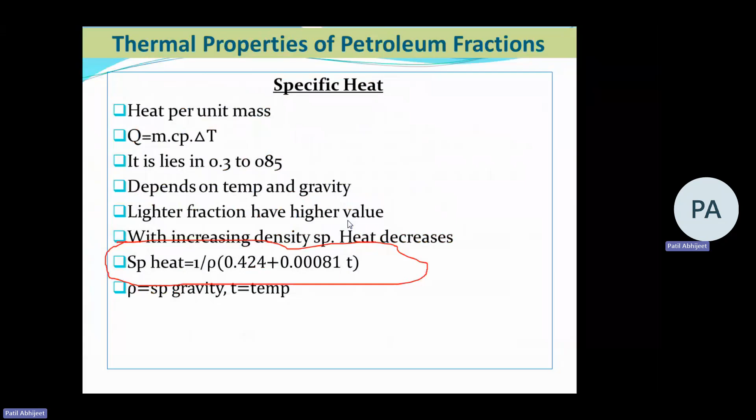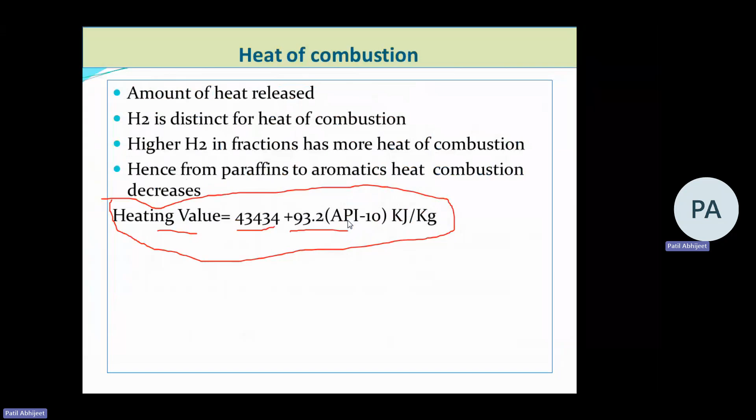Next is the heat of combustion, that amount of heat released when it is burned with oxygen, with its specific volume, with its known value. Okay, so hydrogen has the highest heat of combustion, which is different from other heats. Next is the latent heat of vaporization. It may be fusion and thermal expansion as well. Okay, the last property is what we call the spontaneous ignition temperature.

The temperature at which the petroleum fraction can catch fire and burn continuously without the help of any external agency. The external agency may be a flame, it may be any other type of agency which motivates, or you can say forces, it to catch fire at a higher level. Okay, so that is called the spontaneous ignition temperature.

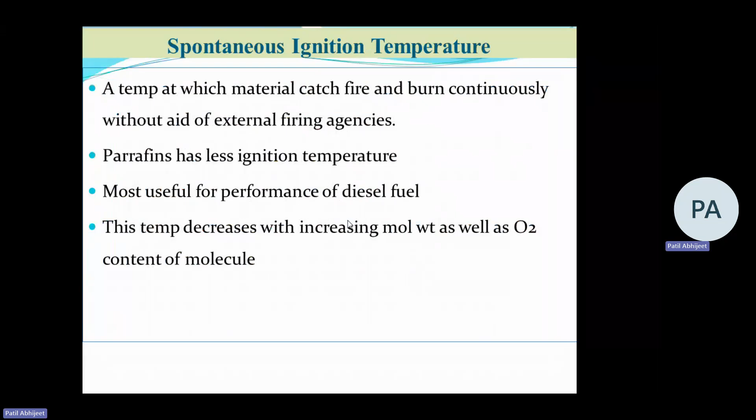Okay, the most important property is viscosity. Viscosity is that property which is especially applicable for lube oils. Everyone knows that viscosity is the property by which it offers resistance to flow. So viscosity is that property of the oil which offers resistance to the flow through the device.

Okay, so this property removes all the frictional forces between the two moving bodies, and based on that, viscosity index is the most important consideration, because viscosity index indicates the variation in the viscosity characteristics with respect to temperature. Everyone is aware that viscosity goes on decreasing with increase in temperature. So different devices like the Ostwald viscometer are there that measure the viscosity.

Then the Redwood viscometer is there. The Redwood viscometer is specifically used for petroleum products, for measuring the viscosity of that oil, and generally we are calculating kinematic viscosity. Kinematic viscosity, I think you are aware, is the ratio of absolute viscosity to the density.

And always remember, in the refinery, absolute viscosity is not considered. We are always considering kinematic viscosity, and CST, that is centistokes, is the commonly used unit for specifying it. In literature it will be said it is a viscosity, but from the unit point of view it will be mentioned in terms of CST, that is centistokes. So obviously it is a kinematic viscosity.

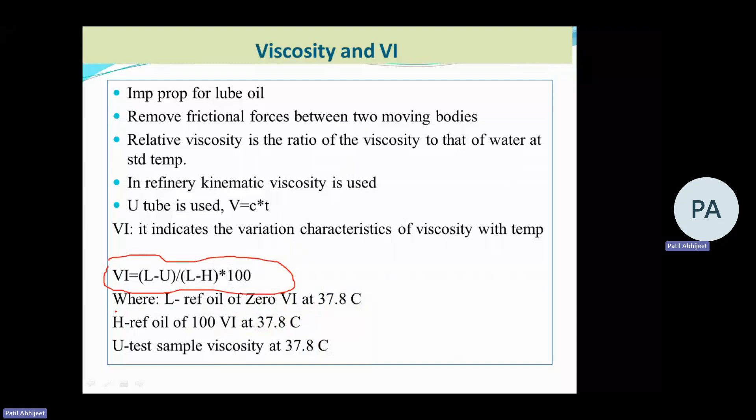VI is equal to L minus U divided by L minus H into 100, where L is the reference oil of 0 VI at 37.8 degrees Celsius, H is the reference oil of 100 VI at 37.8 degrees Celsius, and U is the viscosity of the sample for which you are going to calculate its viscosity index. So L and H belong to the reference oils. Generally, the reference oil is considered as a lube oil in many cases. So this was regarding viscosity, another property.

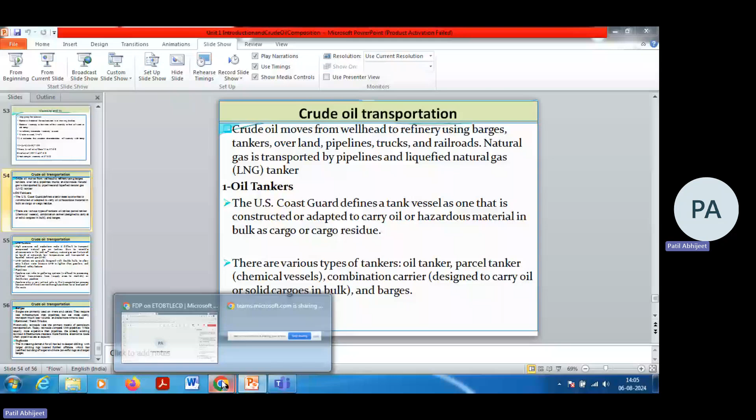These transportations are costly. The costlier one is road transportation, because for that you have to use sources like petrol or diesel for transporting through the various kinds of trucks.

So this is regarding the transportation. The natural gas is transported either by means of the pipelines, or even through using some barges also. Even in the US, these are transported through various kinds of barges.

Now the first option which is available is oil tankers. Oil tankers are the first choice for transporting the liquid. But when hazardous material in bulk goes through the cargoes or cargo residues, there are various types of tankers like oil tanker and parcel tanker. Especially parcel tankers are used for chemical vessels. These are simple storage vessels, but they have been lined with certain kinds of materials. Or they may be some combination carrier designed to carry oil or solid cargoes in bulk phases, or in some cases barges may be used.

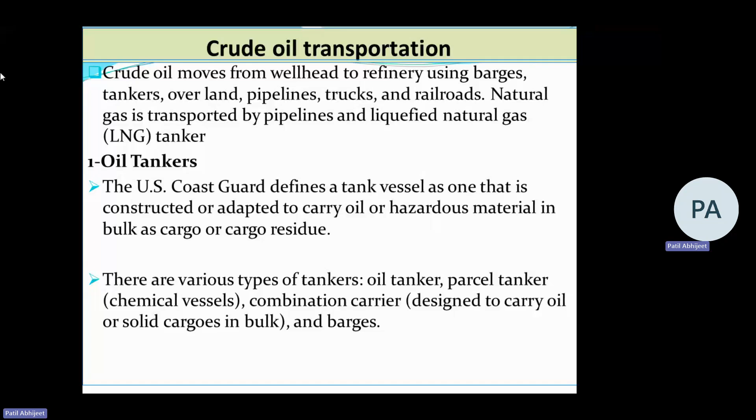Another one is LNG tankers. These are very high pressure and explosive. That's why they are coated with a certain material which will not form a flame. They have been protected by two different layers, or you can say they are protected to prevent certain kinds of loss.

Due to scientific advancement, the natural gas can be converted to a liquid at very low temperature, and it may be transported as LNG, what we call liquefied natural gas, and LPG, liquefied petroleum gas, may be another way.

So these are the traditional ways. We can say these are traditional, but they are also in ongoing use, because there is no such invention which will transport your oils, crude oil, petroleum at a faster rate within a minimum period of time. That kind of invention is not there. It may be available, but it is very costly. Again, cost matters a lot. So whatever preferable methods give maximum efficiency of transportation within minimum cost, that as an engineer we need to see.

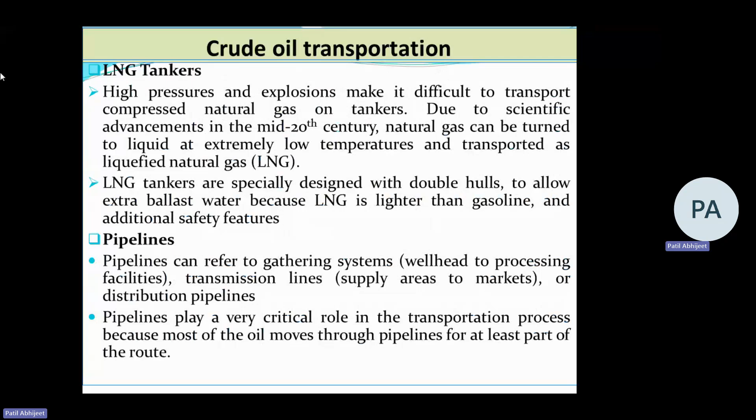The last option which comes is the pipelines. Pipelines can refer to the gathering system, what we call wellhead to the processing facilities. Transmission lines may be used, some distribution pipelines may be used, and these pipelines play a very critical role in the transportation process, because the oil moves through the pipelines for at least part of its route. So these are the various methods which are available.

So these are the various kinds of transportation. In general, you can say oil tankers, LNG tankers, pipelines, barges, tank trucks, railroad, and tugboats. These are the various transportation techniques.